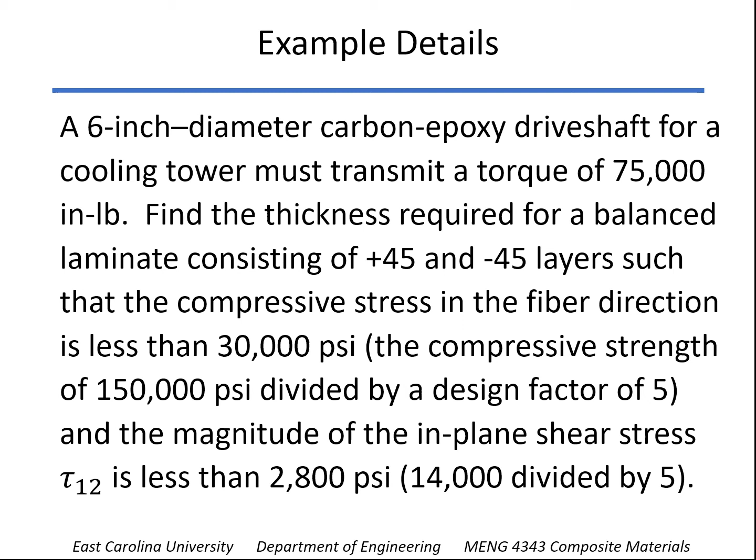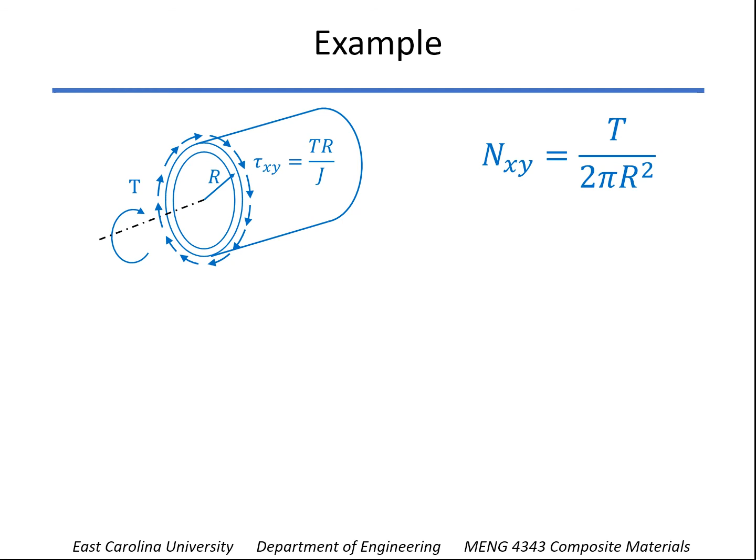Again, the compressive strength of this material we've rated at 150,000, so we'll just divide that by 5. The in-plane shear strength is 14,000 psi, so again we divide that by 5, and we want to keep the magnitude of the shear stress at less than 2,800 psi. Okay, so remember from last time, when we have a torsion on a tube, we can calculate the stress resultant in xy as such. And that works out to be 1,326 pounds per inch. And so just arbitrarily, we're going to try using 1/10 of an inch for both the plus 45s and the minus 45s and see what we get.

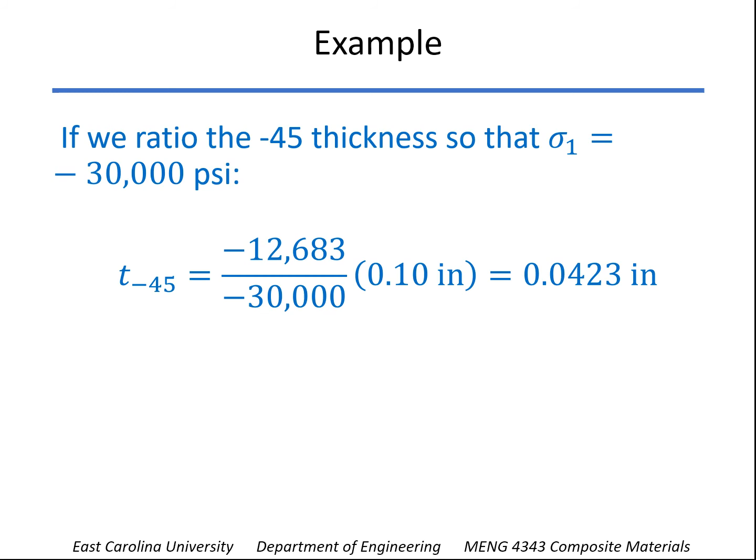So there's the stresses, and since this is a linear problem, that is, if we increase the load, the stresses increase linearly. If we increase or decrease the thickness, the stresses change linearly as well. So all we have to do really is ratio the minus 45 thickness so that we hit the critical value of minus 30,000 psi, 30,000 psi compression, that is. And if we do that, we come up with a thickness of the minus 45s of 42 thousandths of an inch. And again, we want it to be balanced, so we set the plus 45s at the same thickness, and it's a little less than 1/10 of an inch. 85 thousandths of an inch is our total.

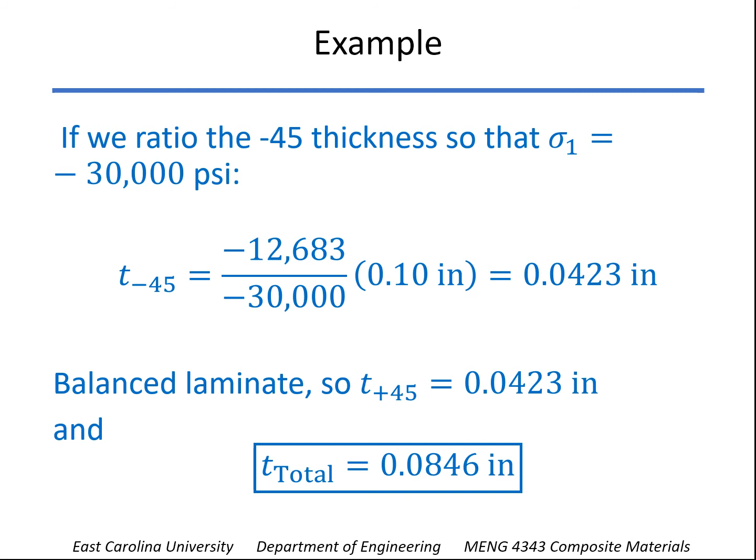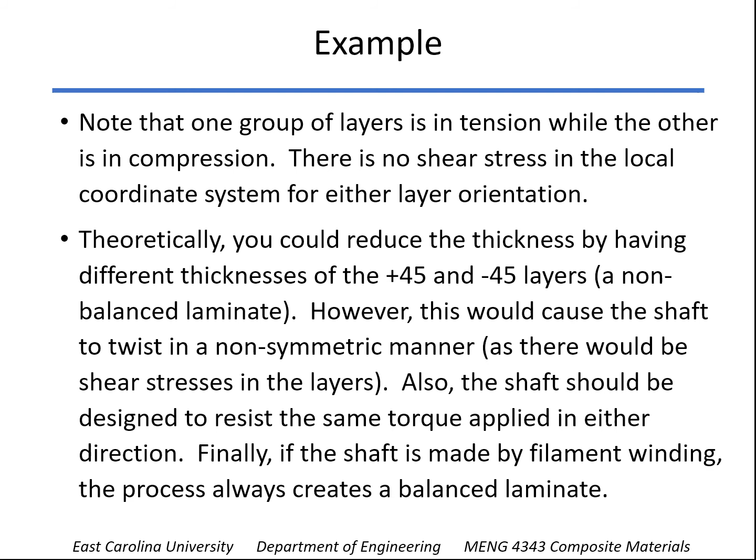And again, we saw that one group of the layers went in tension while the other went in compression. So in theory, could you say, well, the plus 45s tended to be not critical, so could we just reduce the thickness by having different thicknesses of plus and minus 45s? You really don't want to do that, because if you did put a twisting moment on there, the shaft would twist in a non-symmetric manner, so it would start to bend as well. Also, most of the time you're going to design the shaft so that you can twist it in either direction with the same factor of safety. And if you made this shaft by filament winding, which is most likely, then that process always creates a balanced laminate. So having a balanced laminate seems like a good idea here for our design.

All right, so let's change it up a little bit. A lot of times when you have a drive shaft, it's maybe lengthy and under its own weight has some bending associated with it as well. So we're going to look at a bending moment of 80,000 inch-pounds. That's going to be applied in addition to the torque that we just showed. And again, a plus and minus 45 laminate. What's the required thickness? Let me go back to the spreadsheet here and look at variation A.

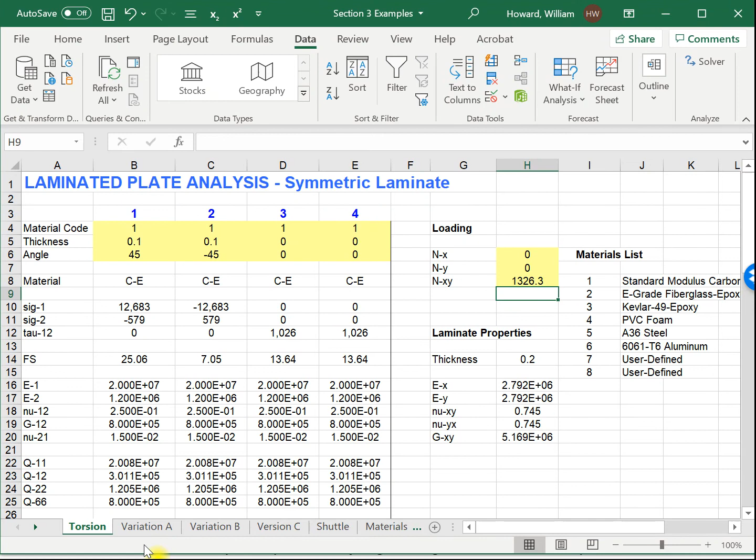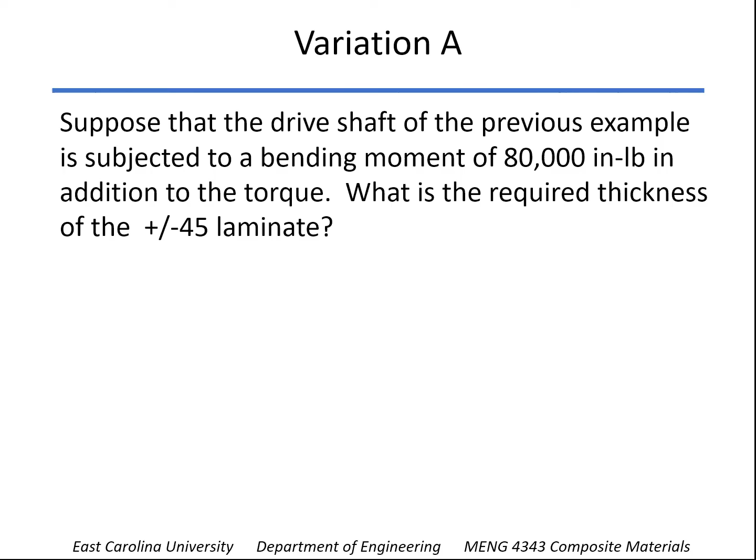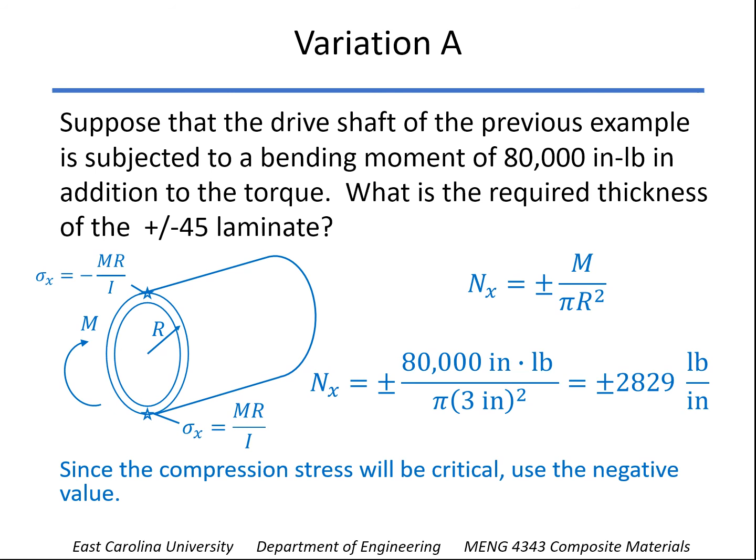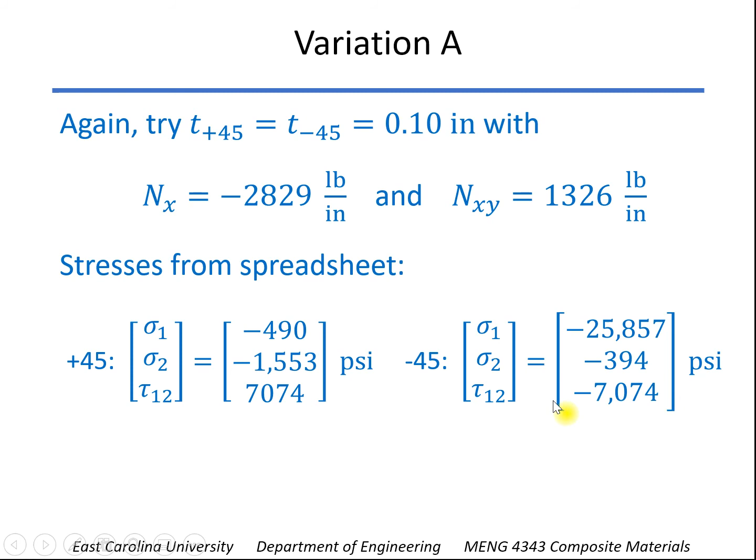And here are the stresses then that we just showed you off the spreadsheet. And in this case, notice this is less than 30,000, so theoretically we could make it thinner and bump this up to 30,000, but both of these are way over our 2,800 psi maximum in-plane shear. And so we have to ratio the thickness upward in this case, and we need about 1/4 inch of both the plus and the minus 45. So our total thickness is over 1/2 inch. So not very good.

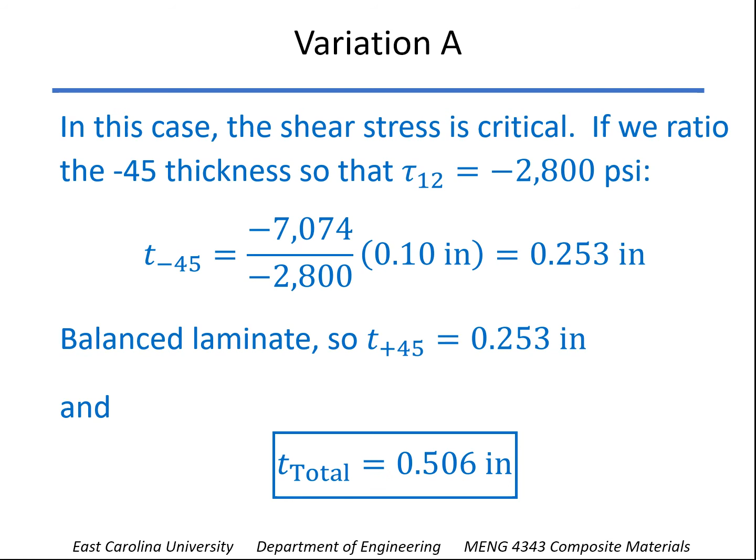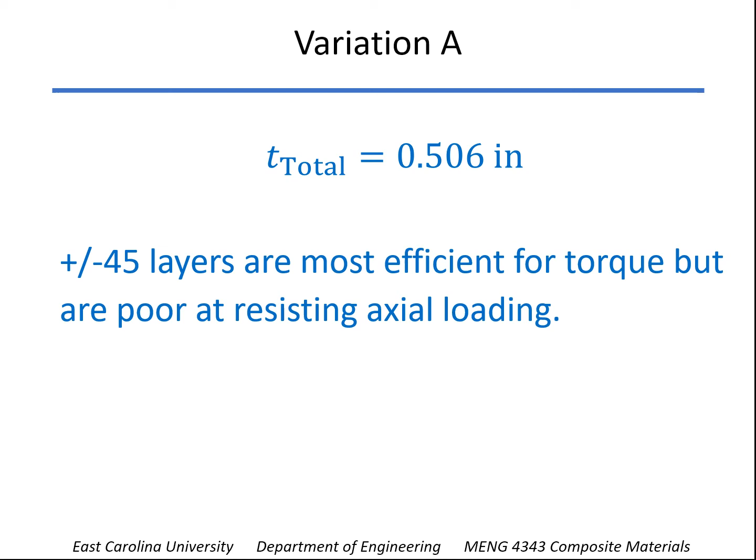And again, that's because the plus and minus 45s are really not a very good design for the axial loading. They're really good for the torque, but not so good axially. So let's do a little variation. Say if instead of using 45 degrees, what if we make that angle theta? We can vary that and still look at the same torque and the bending moment.

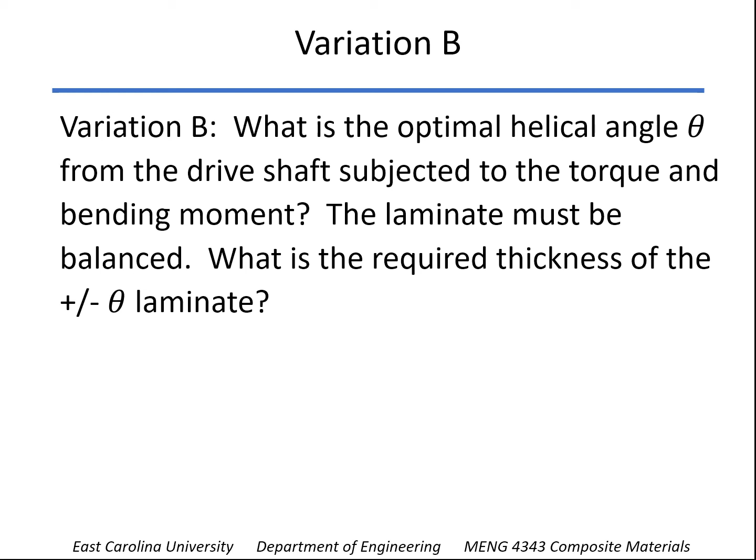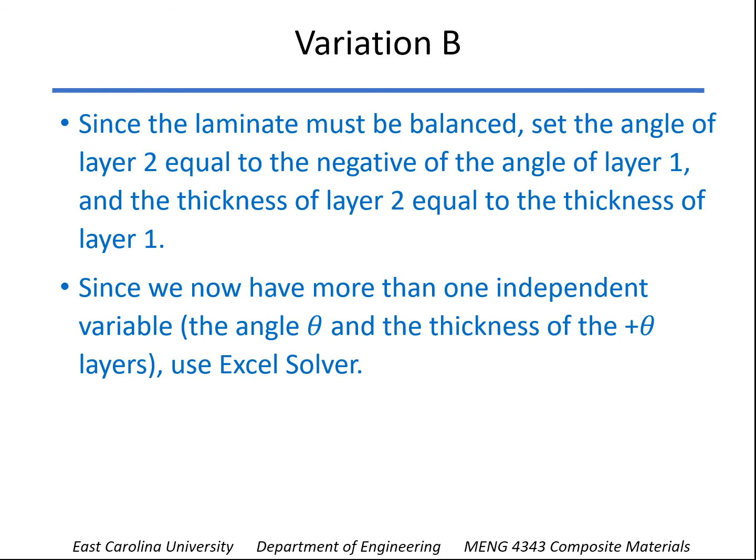We still want the laminate to be balanced, and what's the required thickness of that plus and minus theta laminate, and what is the value of theta as well? Now again, the laminate's got to be balanced, so in the spreadsheet we're going to set the angle of layer 2 equal to the negative of the angle of layer 1, and the thickness of layer 2 equal to the thickness of layer 1. But now we have more than one independent variable, so we can't just do the simple ratioing like we did earlier. So we're going to use Excel Solver.

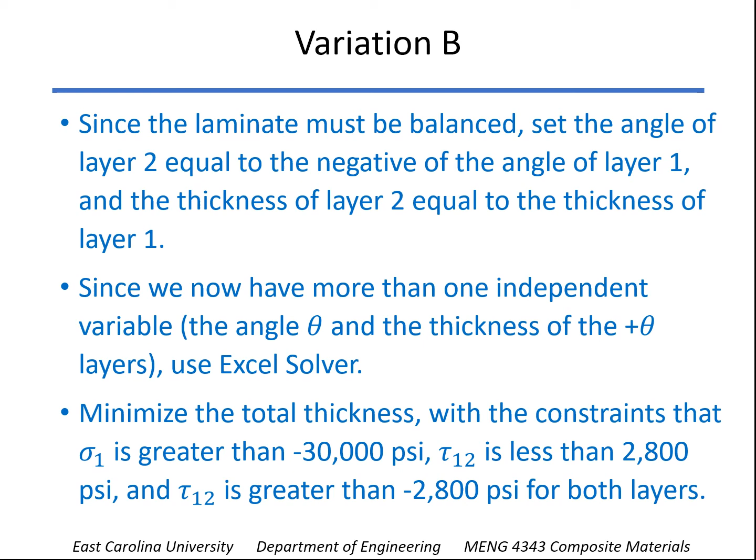And our solver model is this. We want to minimize the total thickness with these constraints. Sigma 1, we want it to be greater than minus 30,000 psi. In other words, the compressive stress less than a magnitude of 30,000 psi. And we want the magnitude of the shear stress in both layers to be less than 2,800 psi. So we have to do that by saying tau 12 is less than 2,800 and that tau 12 is greater than minus 2,800.

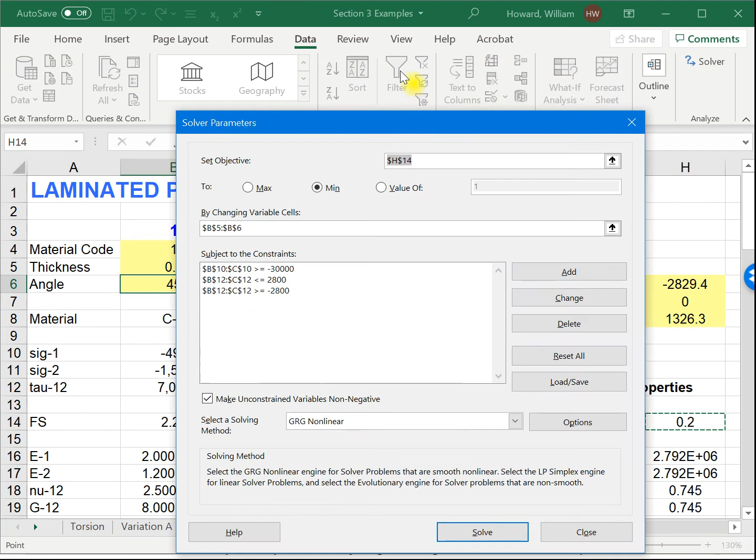All right, so here we go with variation B. Now again, in this case we're going to use solver. You can see we're set up here that we want to minimize the thickness by changing these two cells, this thickness and this angle. Now we already have this one being equal to that one just within the cell, and we also have this angle being equal to the negative of that. And so here are our constraints. You can see how they're added one at a time here.

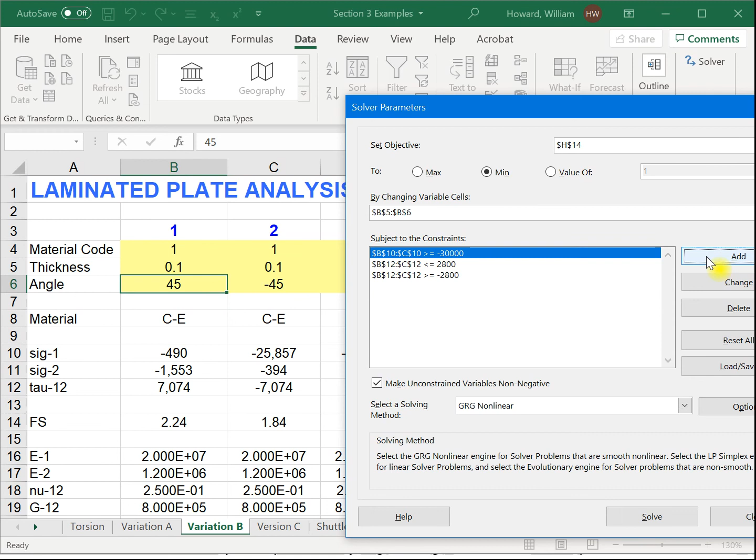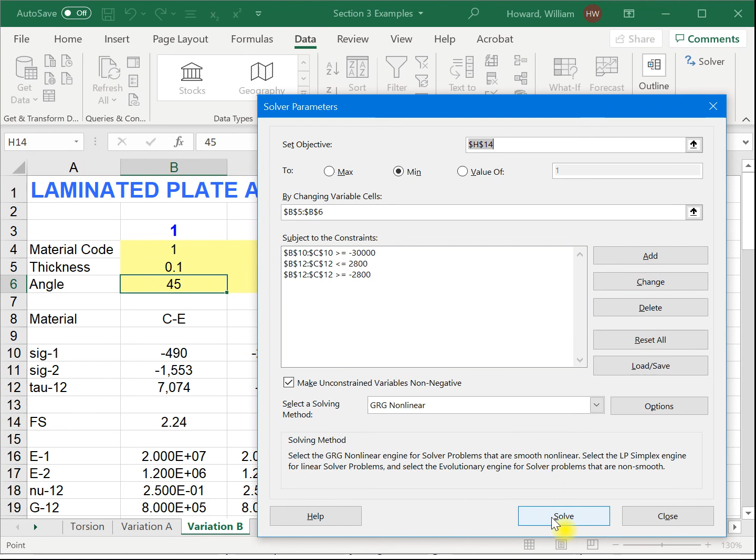Well, actually, let me just do a change instead. You can see we just have to highlight all of the values. Well, in this case we just have 2 layers, but the sigma 1 value of both layers have to be greater than or equal to minus 30,000. And similarly, the shear stresses less than 2,800, shear stresses greater than minus 2,800, and let's hit solve. And so what we find is the optimum angle is about 22.4 degrees, and we end up with a thickness of about 2/10 of an inch. So it was a 1/2 inch if we used plus or minus 45s. When we optimized the angle, it came out a good bit lower.

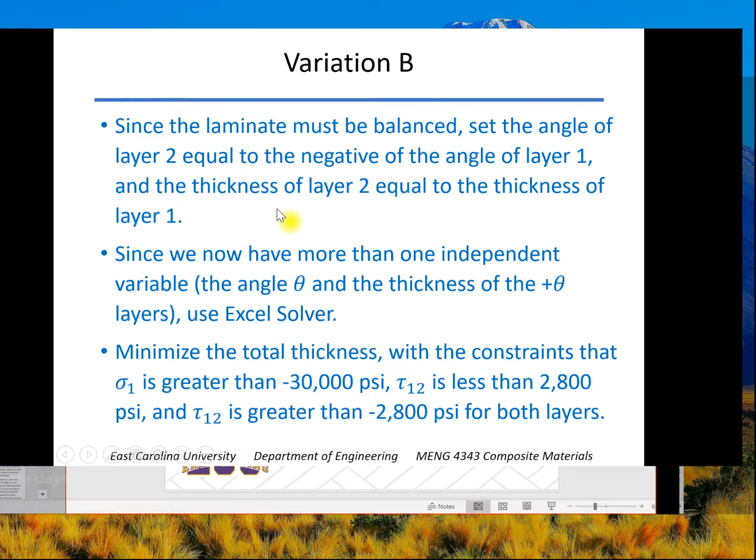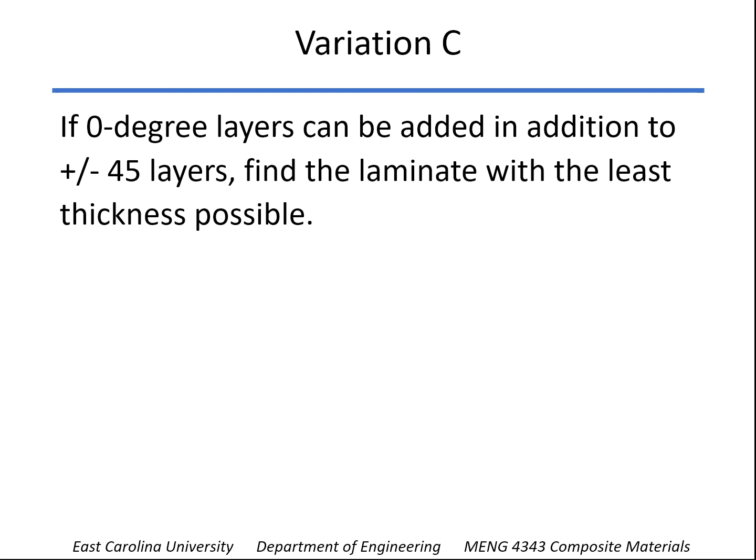All right, so instead of just using the plus or minus angles, what if we say that we know that plus or minus 45 is really good for torsion, and we know that 0 degree is good for axial loading? Let's find the laminate that works best here, least thickness possible with 0 and plus or minus 45s. So once again, we're going to use solver, and once again we'll have 2 independent variables. In this case, the thickness of the plus 45, the thickness of the minus 45 will match that, and thickness of the zeros.

All right, so here's our version C. So arbitrarily, I've set 1/10 of an inch here and 1/10 of an inch here. Again, this value is going to be equal to the value of the plus 45, and you can also see that this angle we can just make minus 45 because we're not going to change that. The things we're going to change are going to be this cell and this cell, these 2 thicknesses. And again, the 4th layer is set at 0, so we can ignore everything from there.

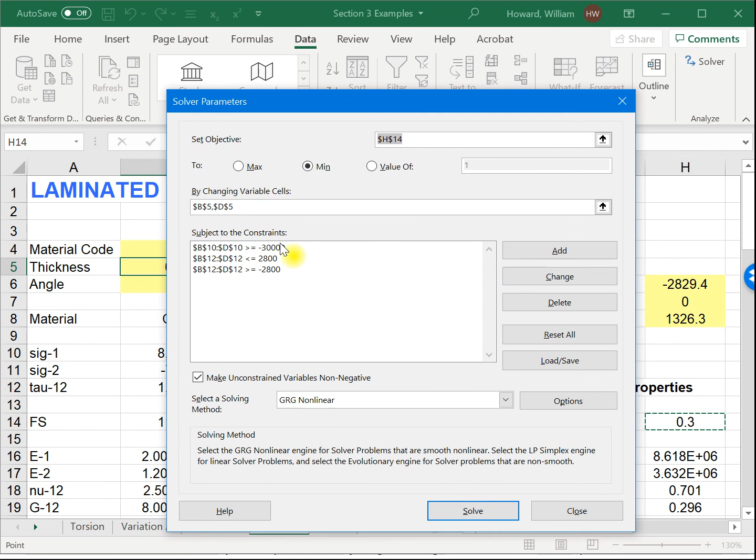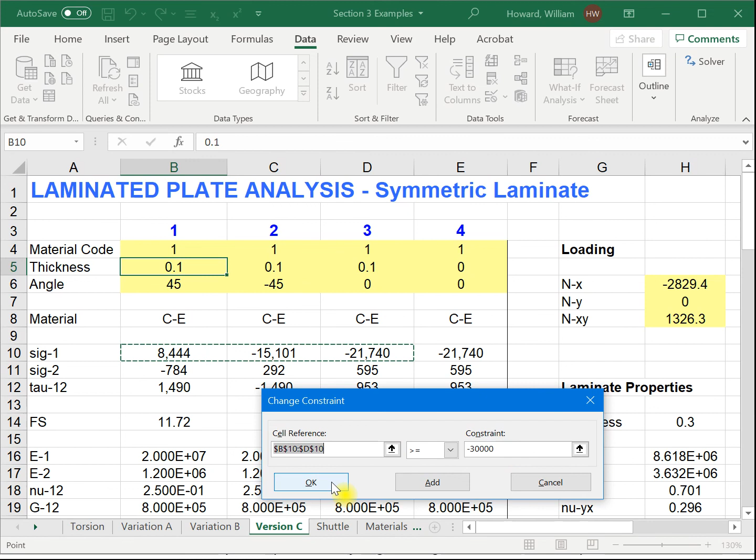And again, our solver model has pretty much the same constraints, although this time, if we look at one of these, oops, sorry, let's pick this one and hit change. You can see we've just applied it to all three of the layers and said that sigma 1 has to be greater than or equal to negative 30,000 psi. And with that, we can go to solve.

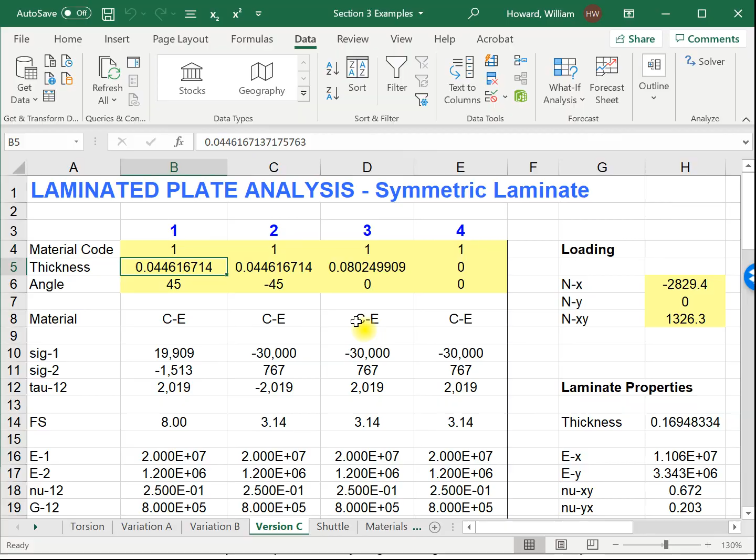And we find that, yeah, we get a better design than we had with just the plus and minus theta, and certainly better than the plus and minus 45 degrees. So here are our thicknesses of the plus and minus 45, and then we add about 80 thousandths of carbon epoxy to that. And so there's again our total thickness. So again, this tends to be an efficient design because of the fact we have the zeros in there for the bending, the axial load, and the plus or minus 45s in there for torque.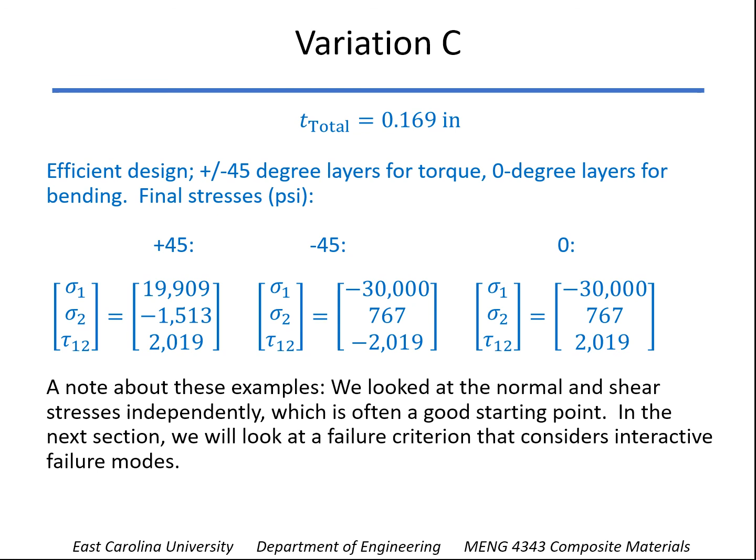So what we did when we looked at these normal and shear stresses independently, what we're really doing is applying a maximum stress failure criterion. And when we get into the next section, we're going to look at an interactive failure criterion, much like the von Mises is an interactive criteria for ductile isotropic materials. We'll look at one that looks at the failure modes altogether instead of independently like this. But before we get to that, we'll do one more example, one that I've talked about earlier, where we tried to design the carbon epoxy cases for the Space Shuttle solid rocket boosters to replace the steel cases.